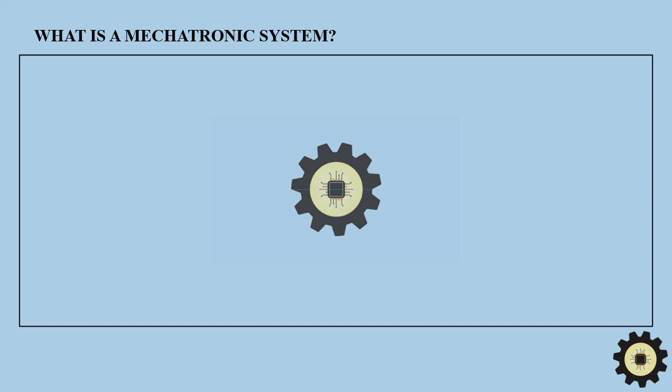Oftentimes, when specialists are asked what is mechatronics, instead of giving a definition, they prefer to give a description of the mechatronic system. Contrary to the variety of definitions for mechatronics, researchers have pretty much consolidated around a common description for the mechatronic system. The latter includes the following main components: mechanical system, actuators, sensors, control system, and user interface.

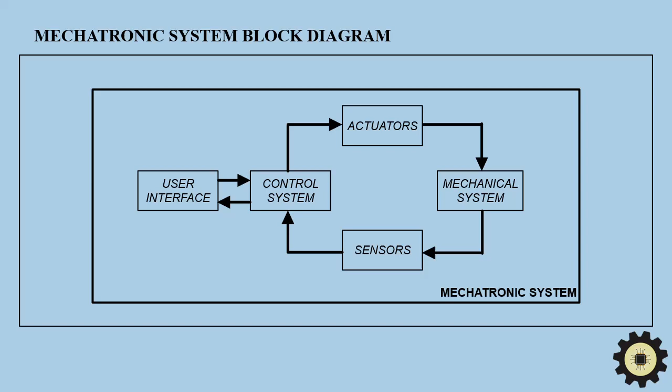The interactions between the components can be given graphically as a block diagram. The arrows show the direction of flow in the system. It should be noted that typically there are two flows in the mechatronic system: information and energy. Mechatronic systems exist which also have a third flow, that of material.

Typically, the mechanical system is the centerpiece of the mechatronic system. It provides a way for interacting with the physical surroundings and enables movement. It also provides support for the other components, much like a skeleton to a living being.

The actuators are the driving force of the system. They provide forces and/or torques that set the mechanical system in motion. The biological analogy here goes to muscles.

Sensors provide information regarding the state of the surrounding environment, as well as regarding the internal state of the system. Therefore, sensors are the senses of the mechatronic system.

The control system includes on its own a number of components, but for starters, it will be discussed as one item. The control system converts information from the sensors into actions performed by the mechanical system, driven by the actuators. The decision of what input sensor information corresponds to what output actuator action is made through a control program. As one may guess, the control system is the brain of the mechatronic system.

Finally, the user interface enables interaction with the user. It should be noted that users can be living creatures, typically human beings but not obligatorily, and/or artificial systems, typically other human-made systems with communication capabilities.

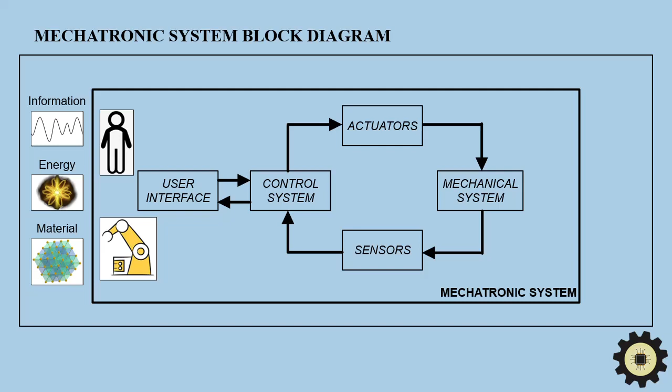So, having defined what a mechatronic system is, let's give some examples and apply the information from the previous discussion. A lot of nowadays everyday objects are in fact mechatronic systems. One such object, for instance, is the scanner.

It has a mechanical system moving the scanning head, typically composed of a toothed belt drive and linear guides. It has an actuator, typically a stepper motor, which drives the mechanical system, positioning precisely the scanning head. It has sensors: end switches for detecting the end of stroke and for homing the scanning head, which positions it at the beginning of the coordinate system.

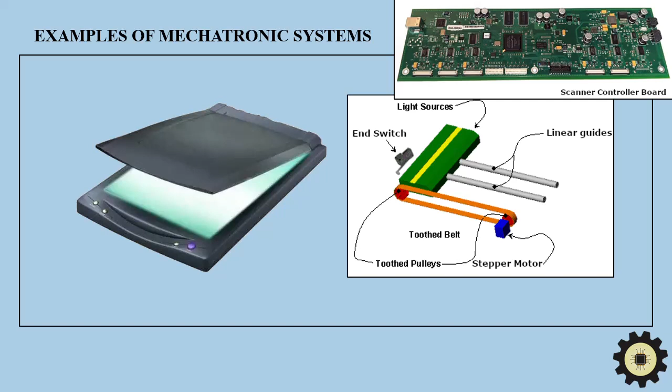The scanning head itself, which is a line scan camera, is a sensor. The scanner has a control system, a dedicated controller orchestrating the scanning process. It has a user interface, both for the human operator and for interacting with a PC and/or a network of other devices. So obviously the scanner qualifies as a mechatronic system based on the definition given earlier.

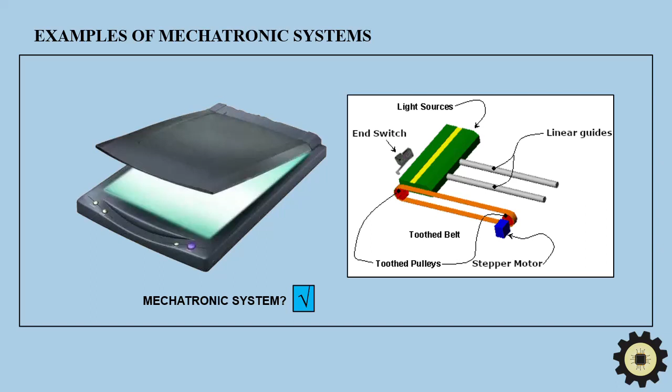Sometimes the considered object is not so obviously a mechatronic system. For example, an automatic parking barrier. Somewhat surprisingly, it is also a mechatronic system.

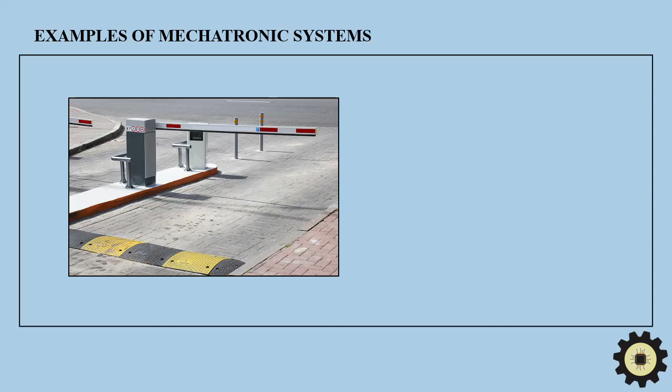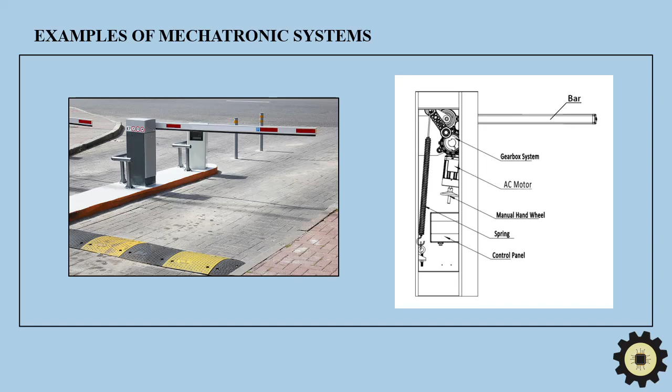The mechanical system consists of the bar, the joint that enables the bar to move around the axis of rotation clockwise and counterclockwise, and the drive mechanism. The actuator is the motor driving the mechanical system and providing the torque for lifting and lowering the bar.

There could be a variety of sensors, but most common are end switches and optical sensors for sensing if an object is going to prevent the barrier from closing. The control system monitors the process of lifting and lowering the barrier and makes decisions on the basis of the sensor inputs and the user interface.

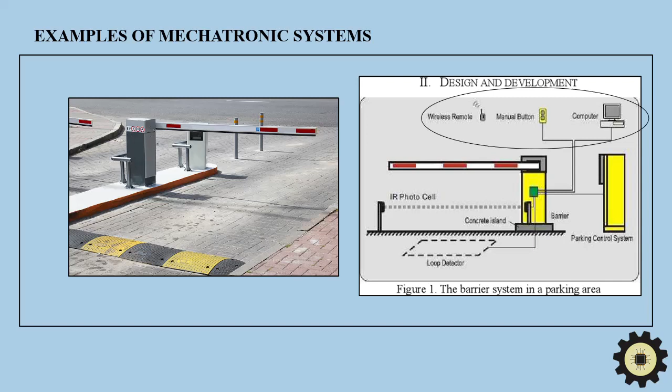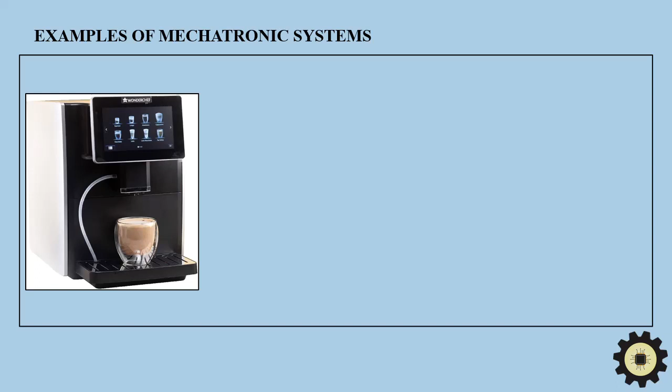Typically, the user interface is a button-operated ticket issuing device, but in the case of a system with a computer vision camera, the interaction does not require human input. It can be said that most automated devices nowadays qualify as mechatronic systems.

The final example that will be given here is probably also the most classical one: robots. This one is so obvious that it is not going to be discussed in detail to prove the statement that it is indeed a mechatronic system. But if you like, you can check it yourselves the same way it was done for the scanner and the automatic parking barrier.

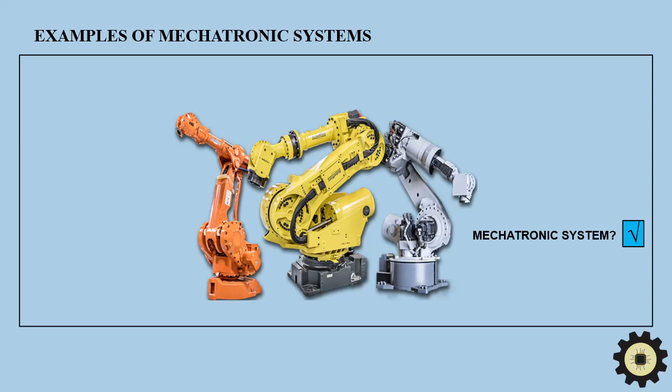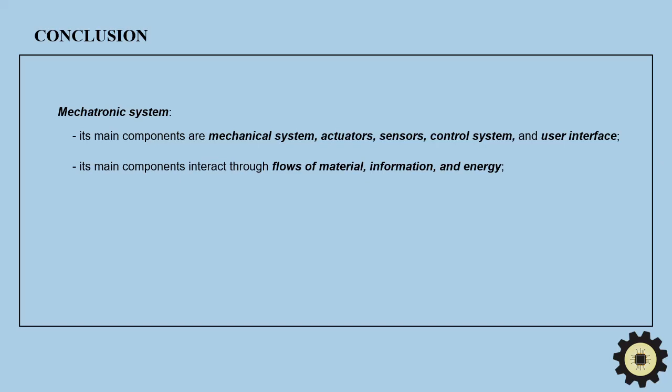In conclusion, let's name again the main components that constitute a mechatronic system and recall some key points. For a system to be named mechatronic, it should include a mechanical system, actuators, sensors, control system, and user interface. These main components interact with each other through flows of material, information, and energy.

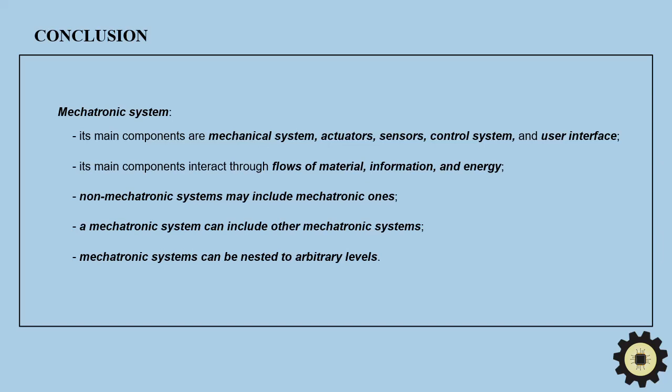The system under consideration may not be mechatronic, but some or all of its components can be. In addition, the components of a mechatronic system can also be mechatronic systems themselves. This integration of a mechatronic system into a mechatronic system can go to an arbitrary depth.